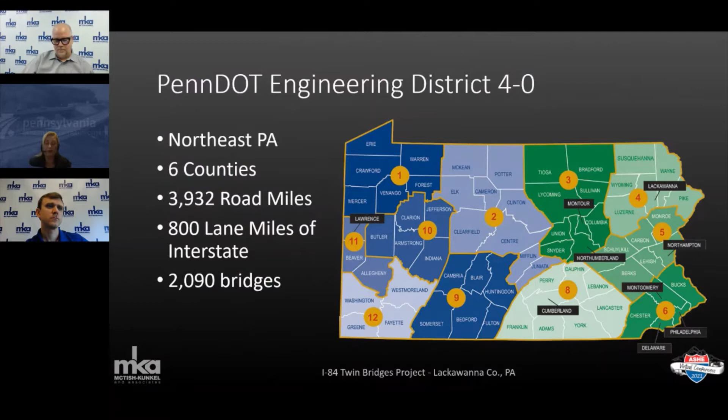First, a little background about PennDOT in this region. Engineering District 4 is located in the northeast corner of Pennsylvania and includes 6 counties. We're responsible for maintaining 3,932 miles of roads, including 800 lane miles of interstate, the most of any PennDOT district, as well as 2,090 state-owned bridges. The Twin Bridges project is located on the I-84 corridor just outside of Scranton near its connection with I-81, I-380, and historic Route 6.

For those who aren't familiar with the area, Scranton is about 120 miles west of New York City, 125 miles north of Philadelphia, and 120 miles northeast of our state capital in Harrisburg. The confluence of interstates and other strategic and priority routes in this area, including I-80, I-81, I-84, I-476, and I-380, provide critical linkage in each direction, and it's vital to the economic health of the area.

About 20% of the U.S. population lives within 300 miles of Scranton. The Twin Bridges project is located in Dunmore Borough and Roaring Brook Township, just outside of Scranton in Lackawanna County. You can see that our project is midway between the I-84, I-81 Route 6 interchange to the north and the I-84, I-380 interchange to the south. The Twin Bridges carry I-84 over Roaring Brook and the D&L Railroad just south of Exit 2 with State Route 435, which is also part of our project.

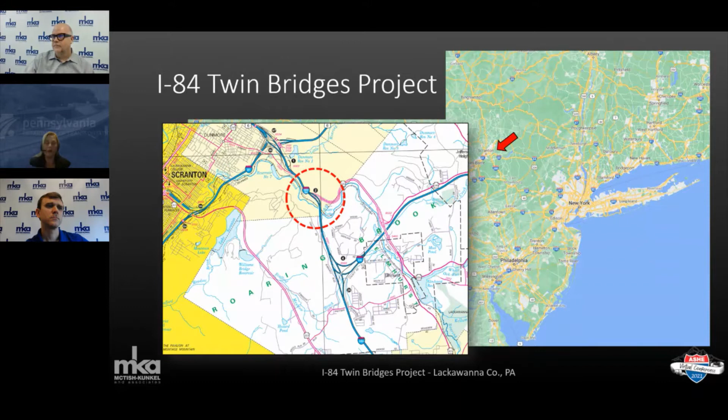A quick timeline on the project: the McTish-Kunkel & Associates Design Team was selected in April of 2015 and notice to proceed issued in July of that year. The environmental clearance was acquired in February of 2018. Bids were opened in February of 2020 with a low bid of $113 million. The project is currently in its second year of construction with substantial completion scheduled for December of 2025 and project closeout in early 2026.

Now I'm going to turn it over to Tim Benner, who will discuss the project's overall development and design.

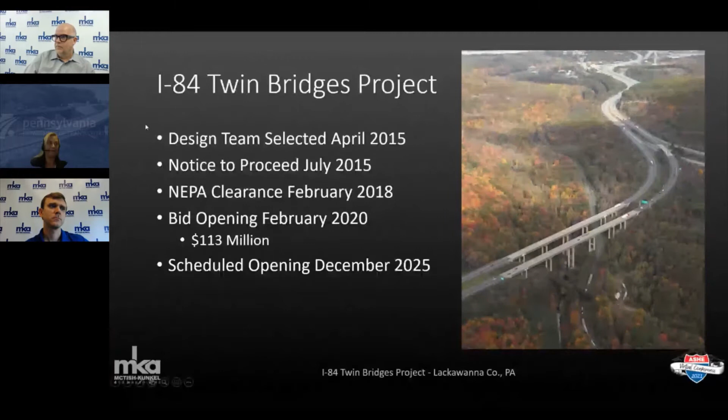Thanks, Sue. I'm Tim Benner, and I was the project manager for the Twin Bridges project.

The current bridges are pictured here looking north towards Scranton. There are 7-span steel twin girder bridges carrying I-84 over the D&L Railroad and Roaring Brook. The bridges are each about 1,100 feet long and 40 feet curb to curb, carrying 2 lanes each. Situated in a steep valley, the bridges are about 160 feet above Roaring Brook, roughly the equivalent of a 12-story building. The bridges also cross the former E&WV Railroad, seen in the foreground.

This bridge was built in 1883 and carried the former railroad over Roaring Brook and the D&L Railroad, although it hasn't been in service since the 1960s. The photo also shows the curved alignment of I-84 to the right as you go north, and the rock cut immediately north of exit 2. This rock face is about 130 feet high.

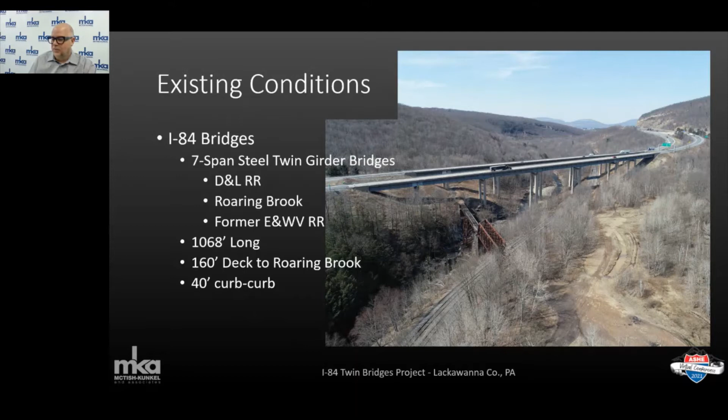The current twin girder bridges are fracture critical and include detailing typical to the design era that has since been determined to be fatigue prone. In addition to general deterioration over the years, these fatigue prone details have resulted in displacement induced cracking in main and secondary members after decades of fatigue cycles under heavy traffic.

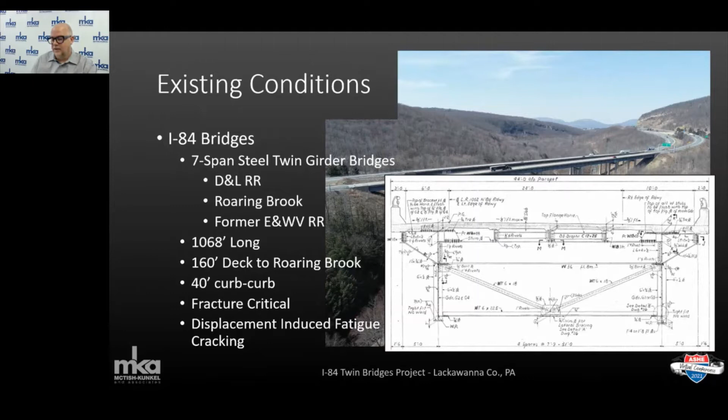PennDOT has undertaken several bridge repair contracts to address the fatigue cracking as well as other general deterioration. In fact, one of the initial items of work on this project was to conduct additional structural repairs to the existing bridges to keep them in serviceable condition as the new bridges were being constructed.

This is a view of the project area looking south towards the I-380 split. You can see the terrain is steep and I-84 is bifurcated through the project area, with the elevation difference increasing as you get closer to exit 2, where the ramp to State Route 435 southbound goes under I-84 westbound. The median width also varies through the project, widening as you get closer to exit 2.

Current traffic volumes on I-84 in this area are around 50,000 vehicles per day. It's also a heavy freight route with 26% trucks.

As you can see, exit 2 includes a non-conventional left-hand exit from I-84 eastbound to State Route 435 southbound. I-84 is 3 lanes wide from the I-81 interchange to exit 2, where the left lane becomes exit only. Exit 1, only half a mile from exit 2, brings in 2 on-ramps in a more conventional manner on the right, one for Tigue Street traffic and one for Route 6 traffic.

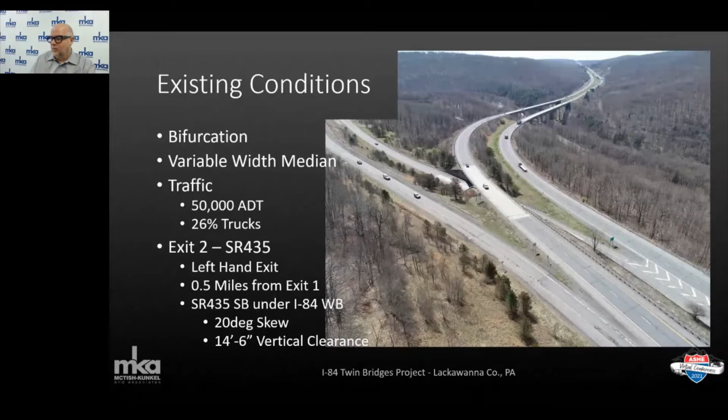The limited distance between the interchanges makes for a weave area that's challenging to navigate from right to left into the exit-only lane for southbound State Route 435. The current bridge over State Route 435 southbound also has substandard vertical clearance at 14 feet 6 inches and is highly skewed at 20 degrees - that's 20 degrees in PennDOT terminology, which is 70 degrees for AASHTO.

In order to develop a solution, it's important to understand the features within the project area. It may look like an untouched rural landscape at first glance, but this location has a long history. It was the location of the former town of Nay Aug that formed along the railroad from the mid-1800s through the early 1900s. The light gray line bisected by I-84 is Drinker Turnpike, which has been in place since the early 1800s. The light gray line to the southwest of I-84 is Brickyard Road, formerly Greenville Road, that connected Nay Aug to points south.

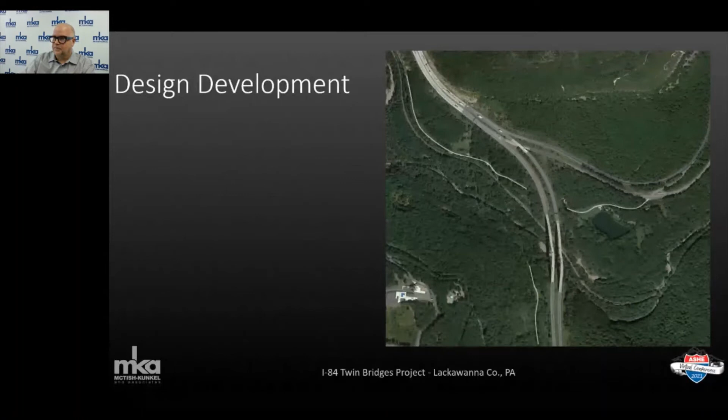Both are currently little maintained dirt and gravel roads. Roaring Brook is obviously a key feature through the project area, as is the D&L Railroad. These two features bisect the project site, creating access barriers to build and maintain the bridges.

Existing utilities include overhead electric and telephone lines, as well as two 30-inch water mains that deliver water from the Elmhurst Reservoir to Scranton. One of the water mains is located directly underneath the current bridge abutments.

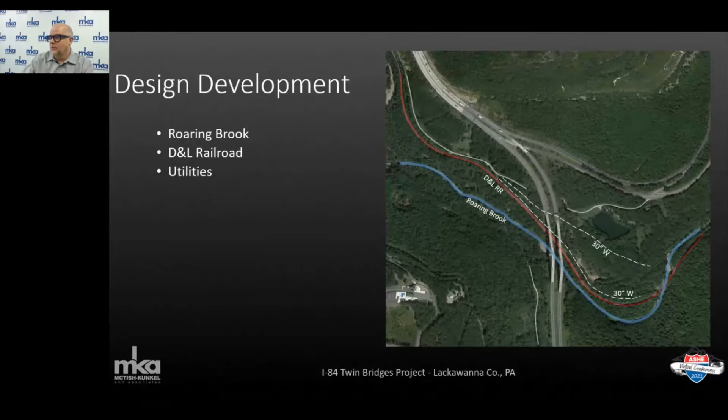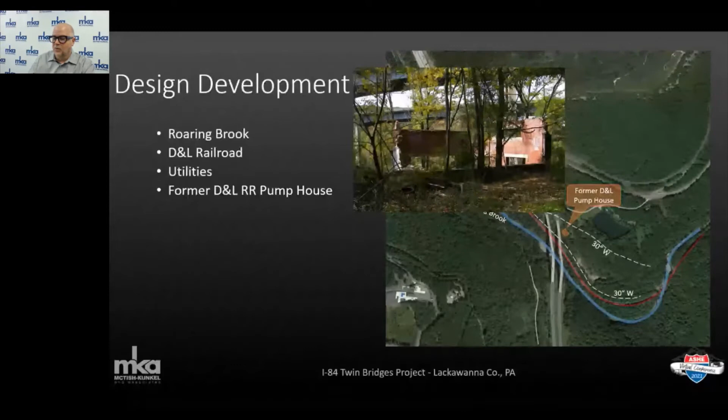We also had remains from the former D&L Railroad complex, including the pump house adjacent to the westbound bridge. The pump house was constructed along with Silver Lake to service the original steam-powered trains.

The former E&WV Railroad was also located within the project site and dates to 1884. Although the track has been removed since the 1960s, the bridge, which we highlighted earlier, is still in place over Roaring Brook and the D&L Railroad.

The Pennsylvania Coal Company Gravity Railroad was the predecessor to the E&WV steam line and was in service from 1850 to 1884. Gravity Railroads were systems of two separate one-way routes, one for loaded coal cars and one for empty coal cars. Cars were moved on narrow gauge track in a series of inclined planes, each with its own stationary steam engine used to pull the cars up the plane by cable. Downhill movement was powered by gravity. The track through our project area site was a light, or unloaded, coal car track.

The former Scranton Gas and Water Power Plant, in operation from 1910 until it was damaged by Hurricane Diane flooding in 1955, is located just downstream from the bridges. Large portions of the town and the railroad were also damaged during this flood event.

The remnants of the former Nay Aug Brickworks factory are located immediately west of the current bridges between I-84 and Brickyard Road. Factory remains are still visible within the I-84 right-of-way, and parts of Old Drinker Turnpike were paved with Nay Aug brick and are still in place. This photo was taken looking south from where the current I-84 bridges stand. The E&WV track runs directly in front of the brick factory, and Brickyard Road can be seen running from the factory to the top left of the photo. Foundations from some of the buildings in the background are still present between I-84 and Brickyard Road.

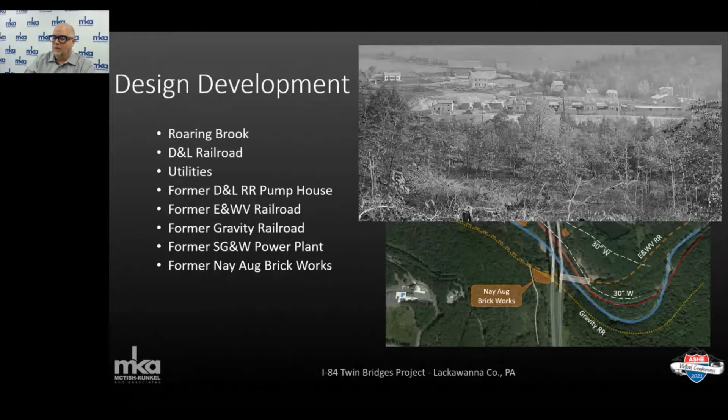To tie everything together, this is an old map of Nay Aug with the SG&W power plant and D&L pump station highlighted. I-84 currently runs between the two, across the former rail yard and the brickworks in the lower right. Both the D&L and E&WV railroads can be seen, as well as Old Drinker Turnpike and the town parcels.

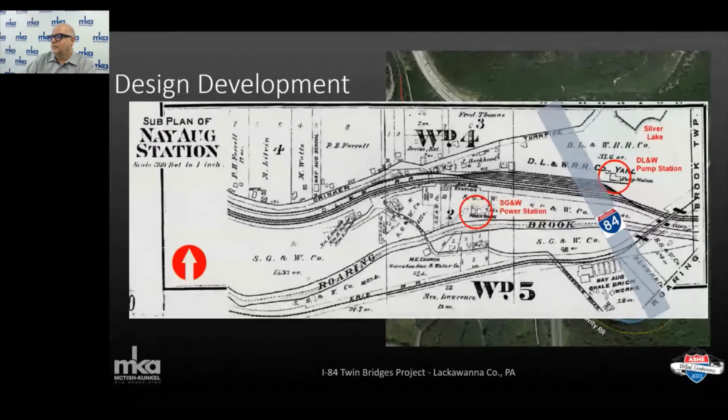We also have several wetland and waterways delineated in the project area. Several could not be avoided and required mitigation. On-site wetland mitigation is being constructed below Silver Lake between the two water lines as part of the project.

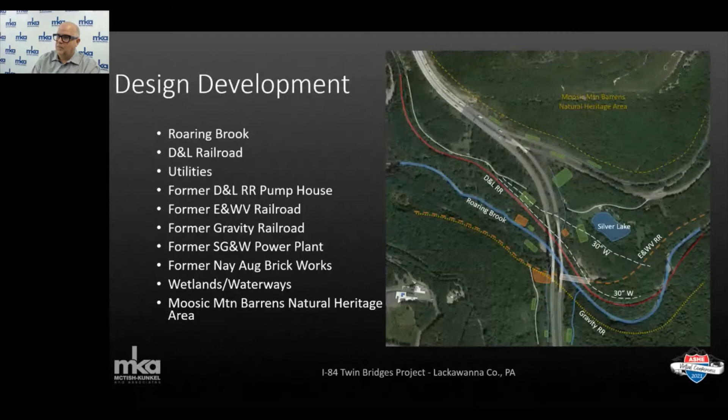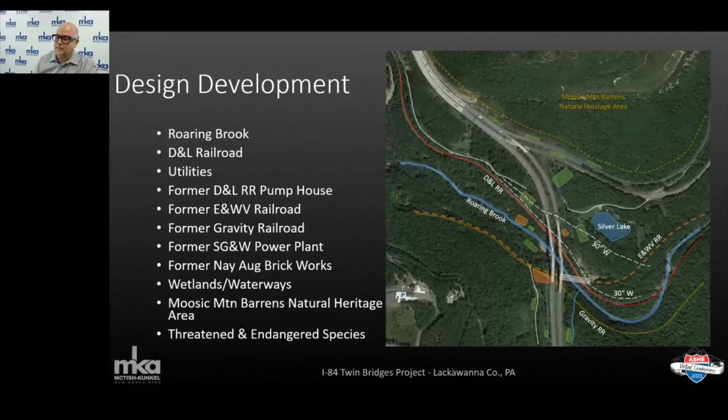The Moosic Mountain Barrens Natural Heritage Area is located just northeast of our project by the rock cut. We also had several threatened species, including timber rattlesnakes, identified near but not within the project area. One thing not highlighted is that several areas adjacent to the project are also part of the Pinchot State Forest, or in the process of being transferred to the state forest. As you can see, we had a lot to work around.

So now that we know what we're working with, here's what we needed to do. First, replace the twin bridges, which are in poor condition, and do it in short order. We needed to minimize impacts to the traveling public by maintaining 2 lanes of traffic in each direction on I-84 during construction. You'll remember that each bridge can only carry 2 lanes and are twin girder bridges, so staging the existing bridges was not possible.

We also needed to maintain traffic on the State Route 435 ramps. Although traffic volumes are not as great as the interstate, the available detour routes are limited, so we needed to minimize any ramp closure durations. Finally, we needed to evaluate the State Route 435 interchange to eliminate the weave condition between exits 1 and 2, provide the required vertical clearance for that movement, and improve safety.

Stormwater management and NPDES permitting was also a big concern during design development due to the terrain we're dealing with. All drainage makes its way to Roaring Brook, but there are limited areas available to address the additional stormwater rates and volumes associated with the project, while avoiding or minimizing impacts to cultural and historic resources. And constructability, the key to every project—we needed to develop a design that addressed all the project needs, worked within our constraints, and allowed for construction to proceed with limited restriction.

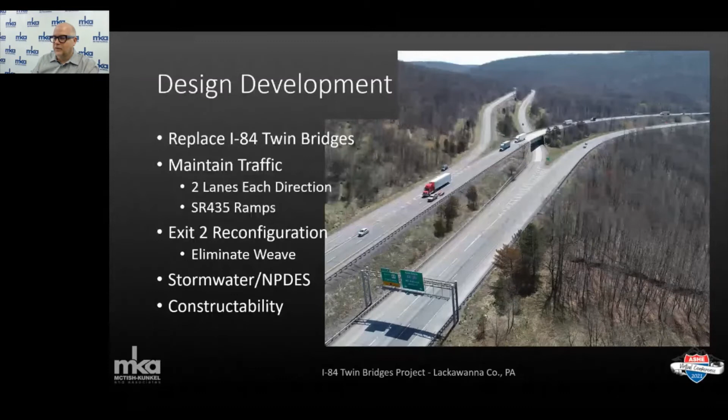After the portion of the new eastbound structure is completed in the median, we'll shift eastbound traffic to the constructed portion, demolish the current eastbound bridge, and complete construction of the eastbound structure. Both new bridges are being constructed in 3-lane configurations with 12-foot shoulders to accommodate current traffic as well as future redecking. Once the eastbound bridge is built, it's wide enough for both eastbound and westbound traffic to be shifted to the new bridge while the westbound bridge is constructed full width.

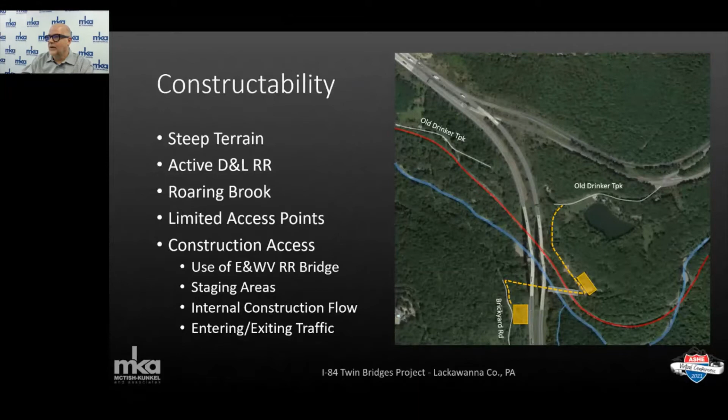The access way can be seen in this aerial taken early in construction. On the right, Brickyard Road is being improved to make the connection from I-84 to the old E&WV corridor and bridge site. You can make out the orange temporary protective fencing around the old brick factory between Brickyard Road and I-84 eastbound, which had to be avoided.

The access road then follows the old rail corridor under the I-84 bridges, across the E&WV bridge, and over Roaring Brook and the D&L Railroad. You might be able to make out the new decking on the E&WV bridge to the left. Ben will cover the railroad bridge improvements later in the presentation.

Multiple levels of access ways were also required to get down to Roaring Brook and the pier locations. We'll show those later in the presentation as well.

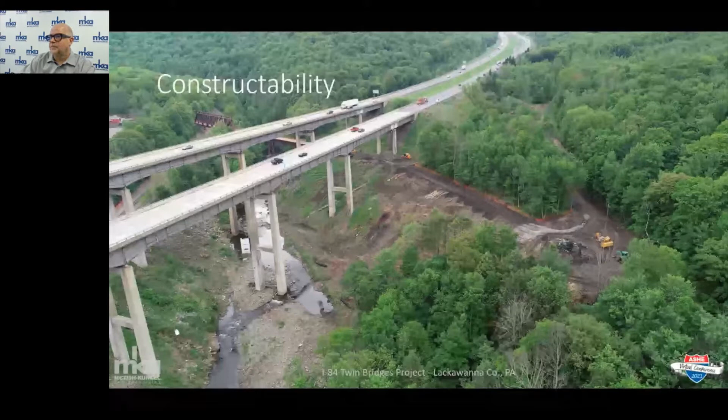This aerial is the eastern side of the site with the access from Old Drinker Turnpike in the lower left. You can see Silver Lake in the upper left and the demolition of the former D&L pump station ongoing near the westbound bridge adjacent to the access road. The access from I-84 eastbound is in the upper right-hand corner.

The construction access basically makes a figure 8 through the project site, connecting I-84 and State Route 435 and keeps equipment and materials moving in and around the site without impacting the traveling public.

Now I'll turn it over to Ben Martz, who will talk about the bridge designs and give an update on construction.

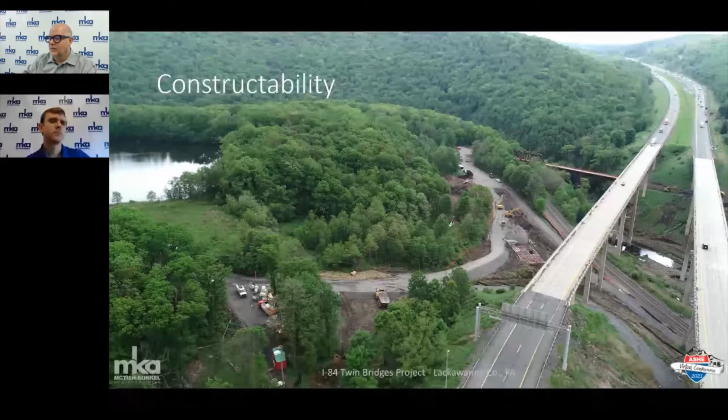Okay, thanks, Tim. My name is Ben Martz, and I was the lead structural engineer on the Twin Bridges project. As we have seen, the abandoned Erie and Wyoming Valley Railroad Bridge forms a critical link for both construction of the Twin Bridges and for its future use conveying the North Pocono Trail.

The existing structure is situated roughly 75 feet above Roaring Brook and 19 foot 6 inches above the active D&L Railroad. It is comprised of 2 simply supported riveted steel I-girder spans, each 96 foot long, and 1 simply supported steel Pratt truss span, 152 foot long.

Substructures include stone masonry abutments, 1 stone masonry pier, and 1 steel pier bent, each having a skew of roughly 45 degrees. To ensure viability for its intended future uses, McTish completed a 2-week site assessment in May of 2016, which included detailed structure inspection, survey, and material sampling to support a rehabilitation feasibility study that shaped the final scope of the rehab work.

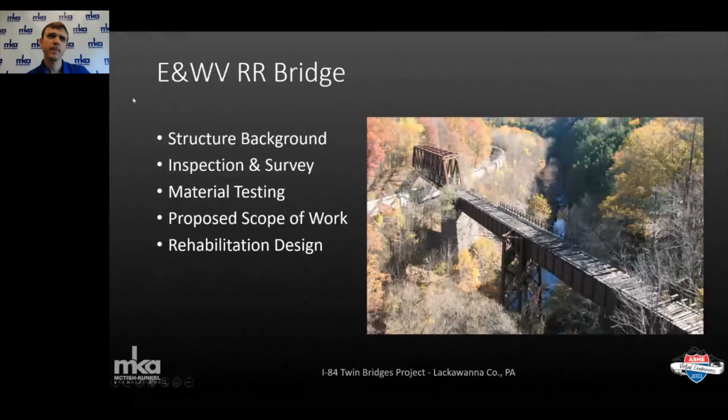Given the age of the structure and its current use, there were no existing plans or inspection evaluations available. This required complete rigging of the bridge to gain access and gather detailed measurements of structural members along with their current condition. Direct access to the top of the structure was available by walking the top flanges with safety hand lines, as you can see in this photo.

Additional access techniques included the use of a man lift for the upper truss portal frame, a pick for the lower levels of the I-girders, and a bosun's chair to inspect the steel pier bent.

Various survey techniques were used to establish the existing structure geometry. Conventional survey using a total station retrieved top of steel girder or stringer elevations, along with bearing seat elevations and truss panel points. An unmanned aerial system using a DJI Phantom 4 Pro drone also supplemented the conventional survey in areas with restricted access, particularly the outside face of girders.

To efficiently generate the geometry of the steel pier bent, a terrestrial scan using a Faro scanner created a 3D point cloud of the existing bent, as captured in this image.

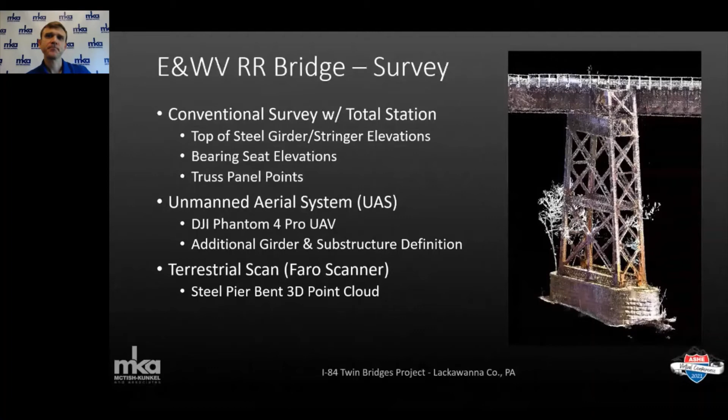Material samples were taken at non-critical areas of the existing steel structure, namely at a truss end block enclosure, a steel I-girder end projection, and at a broken lacing bar on the lower level of the steel pier bent. Steel samples were tested for chemical composition and mechanical properties to support engineering analysis of the rehab design.

Chemical testing showed uniform composition throughout the structure that agrees favorably with early low-carbon steels, featuring excellent ductility and weldability. Composition tests also revealed sufficient amounts of chromium, copper, and nickel that supports weathering steel behavior and is indicated by the well-developed rust patina shown in this photo.

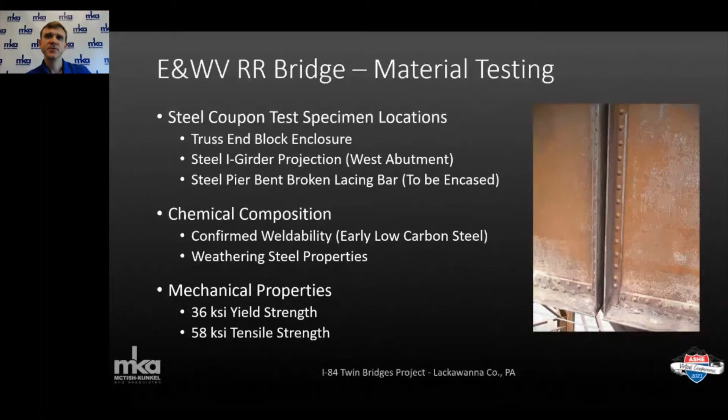Tests for mechanical properties indicated minimum yield and tensile strengths of 36 and 58 KSI respectively.

The rehabilitation scope of work centers around establishing a safe crossing by removal of the existing timber ties, complete cleaning of the bridge, and construction of a new reinforced concrete deck and barriers.

One of the major components of the rehab design was an asymmetric truss displacement needed to achieve a required 22-foot vertical clearance over the active D&L railroad for double stack rail traffic. To avoid impacting the steel pier bend, the I-girders retained their original position, and the required grade differences from raising the truss were taken with variable haunch over the I-girders, roughly 12-inch maximum.

Associated with the truss displacement was a modification of the north abutment seat and construction of reinforced concrete retaining walls to support the raised north approach. The vertical raise in the seat elevation at this abutment was approximately 5 feet.

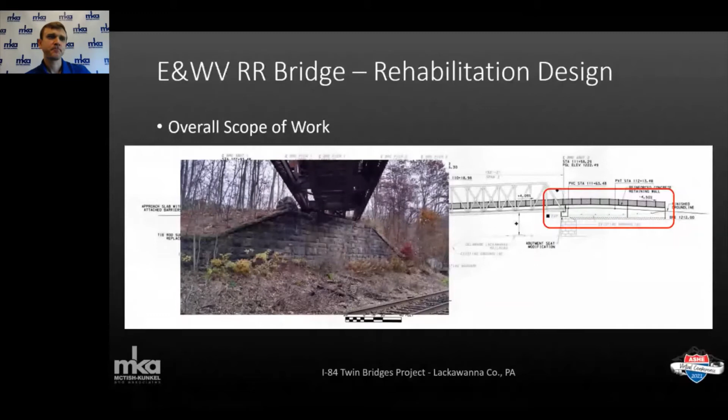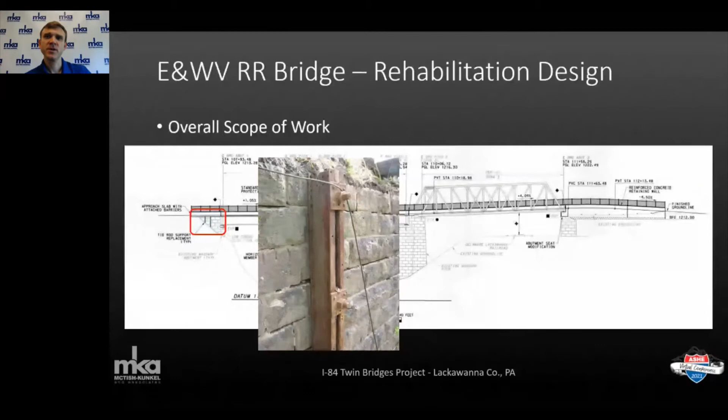Existing tie rod supports at the south abutment were replaced in kind using similarly sized weathering steel members, and stone masonry repointing was also needed in select areas as seen in the photo.

Frozen existing metal bearings at the ends of the I-girder unit were replaced with laminated neoprene pads to relieve thermal forces on the steel pier bent.

The mid-level horizontal lacing members of the steel pier bent suffered from heavy corrosion and were also replaced in kind.

The bottom of the steel pier bent showed heavy corrosion, especially at isolated connection plates, as you can see here. This condition warranted complete concrete encasement of the bottom of the pier bent for a height of roughly 5 feet.

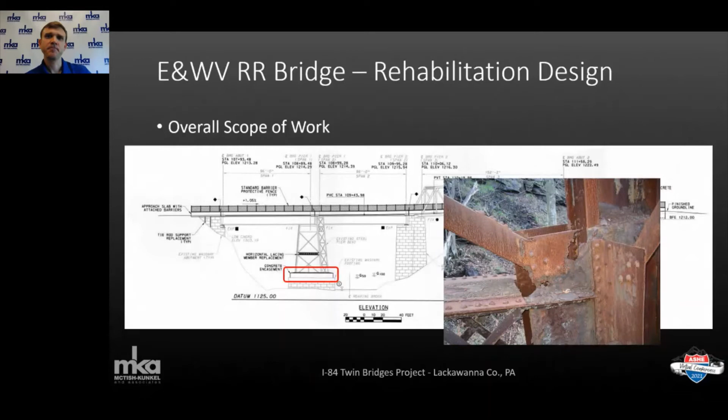Additionally, a new approach slab with attached barriers was detailed at the south abutment to contain the future trail in this area of very steep terrain adjacent to the abutment.

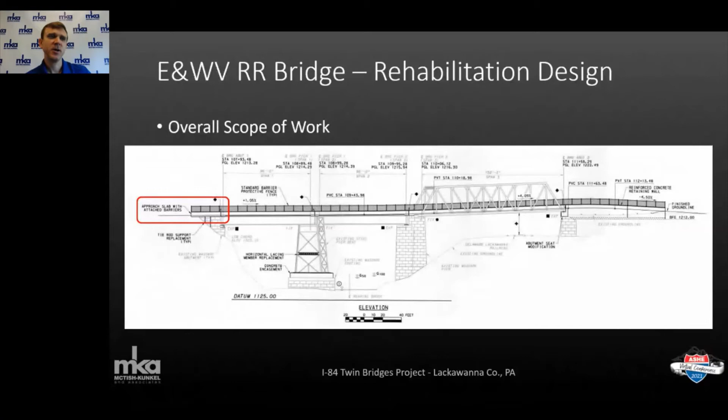Features such as this, along with barrier protective fence along the entire length of the structure and maximum longitudinal grades of about 4.5%, were incorporated into the design to ensure future pedestrian safety.

The proposed typical section over the I-girder spans include an 8-inch reinforced concrete deck with vertical wall barriers and protective fence atop the existing 8-foot deep twin I-girders.

Contractor access was provided through the truss span with a minimum of 12-foot horizontal and 18-foot 10 inch vertical clearance. The 12-foot curb-to-curb width was constrained by the existing truss width and was carried over the entire structure.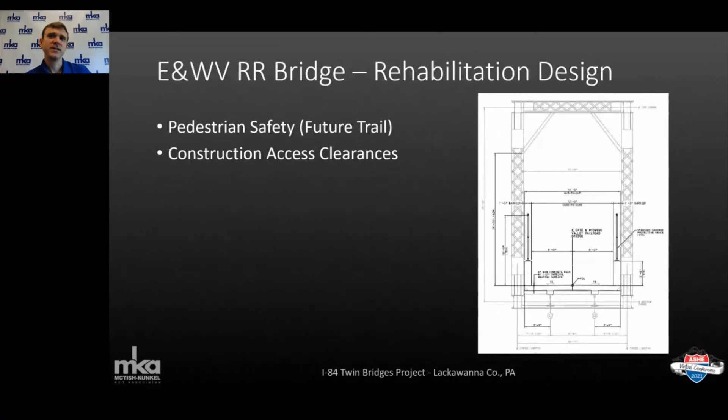The rehabilitation design meets the Secretary of the Interior's criteria for the rehabilitation of historic structures. Members requiring replacement were done so with in-kind features using weathering steel to closely match the existing appearance.

Precise survey of the steel pier bent allowed accurate detailing for the in-kind replacement of the mid-level lacing member as seen here. The north abutment seat modification also incorporates a veneer finish to mimic the existing stonework.

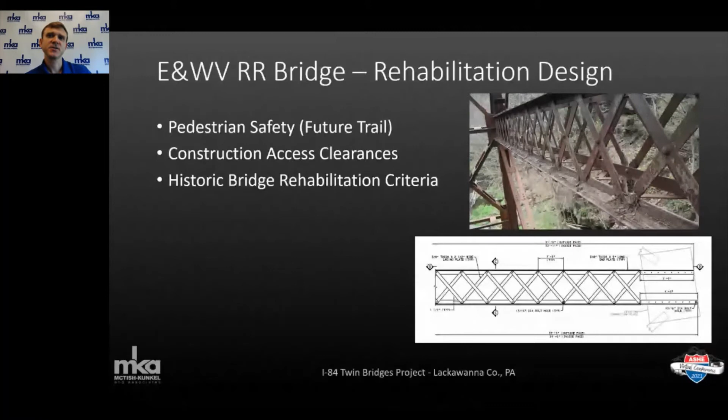Load ratings for the steel truss and I-girders were based on load factor design methodology using PennDOT's Bar 7 software, and the new retaining walls of the north approach were designed with PennDOT's ABLRFD software.

The existing pier bent was analyzed using a 3-dimensional finite element model in STAAD with manual LFD specification checks. Geometry for the steel pier model was generated from the 3D survey point cloud that we saw earlier.

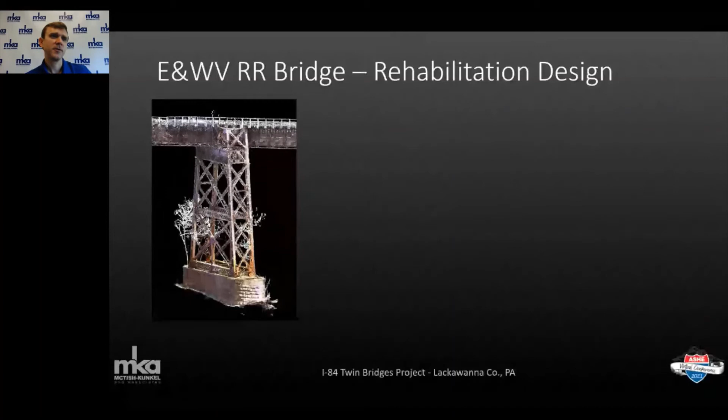A wireframe figure was created from the point cloud to establish nodal geometry coordinates, which could then be imported directly into STAAD to create the 3D analysis model.

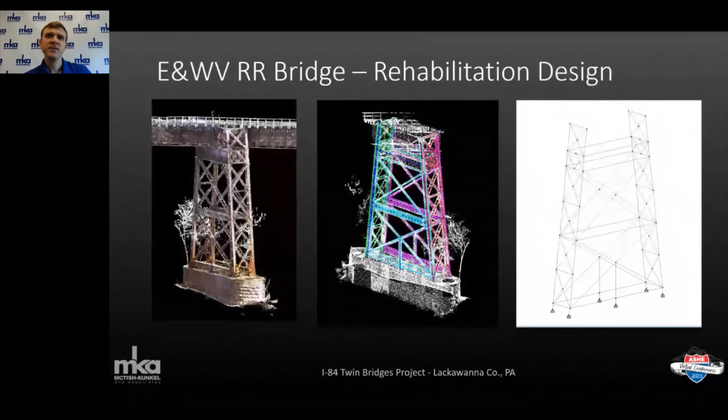Having established appropriate construction access, our focus turns now to the replacement of the I-84 twin bridges.

The design was developed in accordance with the AASHTO LRFD bridge design specs as supplemented by PennDOT's Design Manual Part 4. Layouts of the replacement structures were driven by the intended traffic control approach and site constraints, including the future North Pocono Trail, Roaring Brook, Delaware-Lackawanna Railroad, active PAWC water lines, and existing substructures.

Both bridges are generally on tangent horizontal alignments, except for the northern end spans that are influenced by the curved approach roadway, which produce transitions to full super elevation on structure. The vertical profile over each bridge is also predominantly tangent, except for sag curves that spill onto each end span.

The resulting span arrangement lent to the use of 4-span continuous composite steel plate girder superstructures with spans ranging from 228 feet to 330 feet max.

To achieve proper span ratios, the north abutments had to be placed directly over one of the active PAWC water lines, requiring relocation of the water line to avoid the proposed foundations that we'll talk about later.

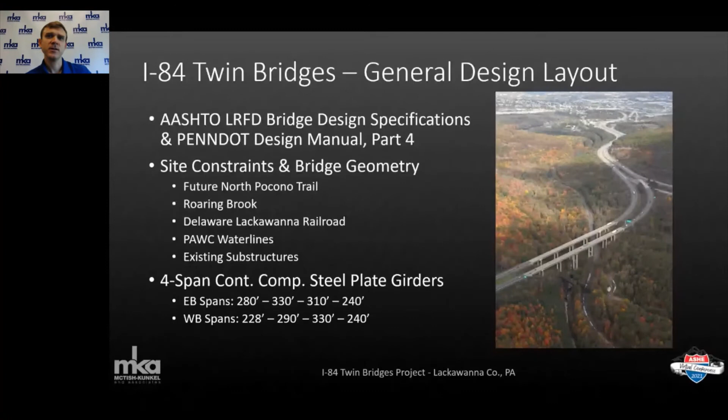The overall width for each superstructure was 63 foot 4.5 inches, which was dictated by the need for 3 12-foot travel lanes, 12-foot shoulders due to heavy truck volumes, and MASH compliant F-shaped barriers.

The final girder framing arrangement included 5 girders at a 13-foot 9-inch spacing with 4-foot 2¼ inch overhangs, and the selected girder web depth was 10 feet.

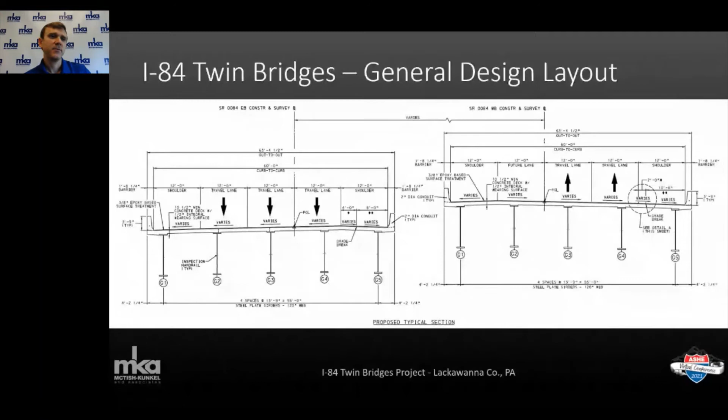With significant clearance under the existing bridges, early action pier construction was vital to minimize impacts to traffic. Half-width staging of the eastbound bridge was selected due to constructability concerns with restricted median width and to avoid closely spaced bifurcated superstructures. The eastbound roadway profile was designed in coordination with the 10-foot girder web depth to ensure satisfactory clearance to build the new pier caps underneath the existing steel girders.

The eastbound roadway horizontal realignment was also set to position the half-width superstructure to avoid interference with the existing bridge. Staging of the eastbound bridge also satisfied the need for full-width construction of the westbound bridge and roadway needed to accommodate a required 9-foot vertical profile adjustment for the new flyover bridge.

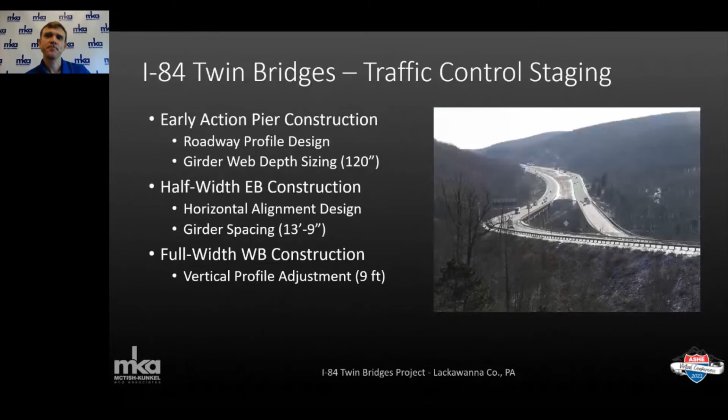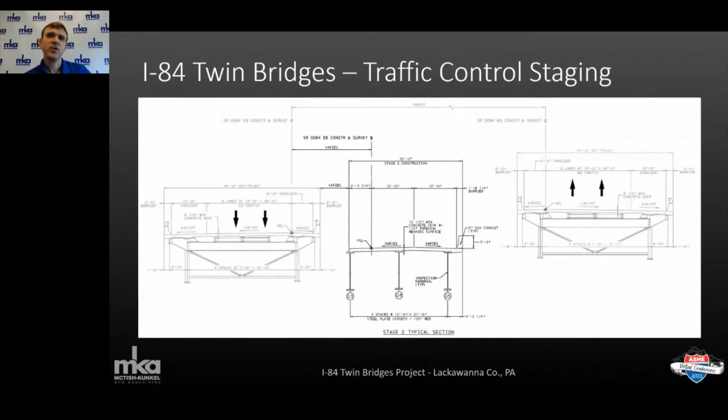The staging sequence begins with constructing half-width of the new eastbound bridge in the median under existing traffic patterns. Of course, all the eastbound piers and the staged abutments have been built prior. 3 of the 5 girder lines are erected in the stage, along with 32 feet of deck to support 2 lanes of staged traffic.

Next, both lanes of I-84 eastbound traffic are shifted to the new half-width structure while the entire existing eastbound bridge is demolished and the remaining portion of the new eastbound superstructure built. This stage requires erection of the remaining 2 girders, which introduces temporary stability concerns that we will discuss in a moment. 2 separate deck pours, including a closure pour between girders 2 and 3, was specified to deal with large dead load deflections.

Following completion of the eastbound bridge, 2 lanes of westbound traffic are then crossed over so that all 4 lanes of I-84 traffic are on the new eastbound bridge. Under this stage, the existing westbound structure can be demolished completely and the new structure built full width.

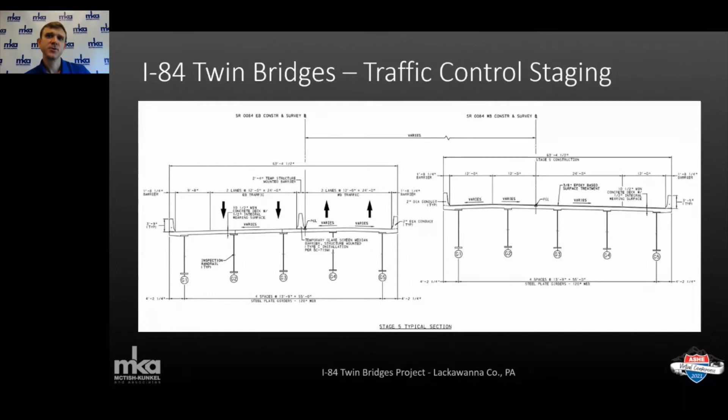Generally speaking, design of the twin bridges was carried out using PennDOT approved software to perform LRFD specification checks. Those aspects of the design requiring refined methods of structural analysis were done using a parametric 3D finite element model in CSI Bridge. With respect to the superstructure, PennDOT STLRFD software was used to design the steel plate girders, while the CSI Bridge model provided verification of live load distribution, cross-frame forces, thermal loads for bearing design, lateral bracing forces, and construction staging analyses.

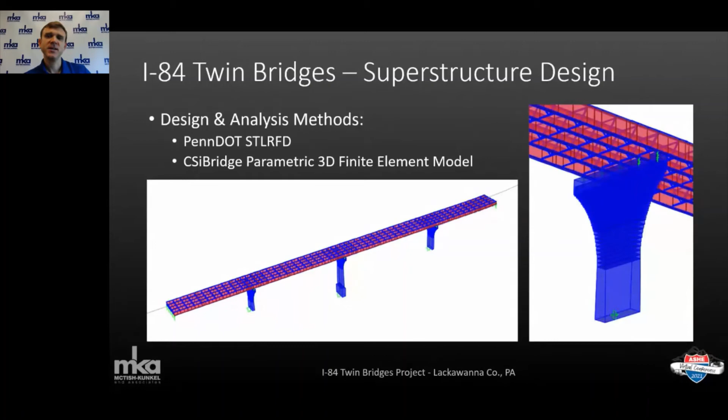The steel plate girders use grade 50 weathering steel with HPS 70W steel in flanges over the piers. 13 field splices limit field sections to a maximum of 105 feet to accommodate shipping and girder erection. Plate sizes were detailed as uniform as possible with 2 discrete flange widths, 34 inches over the piers and 28 inches elsewhere. The 10-foot web depth was also matched on the flyover bridge to realize fabrication economies of scale.

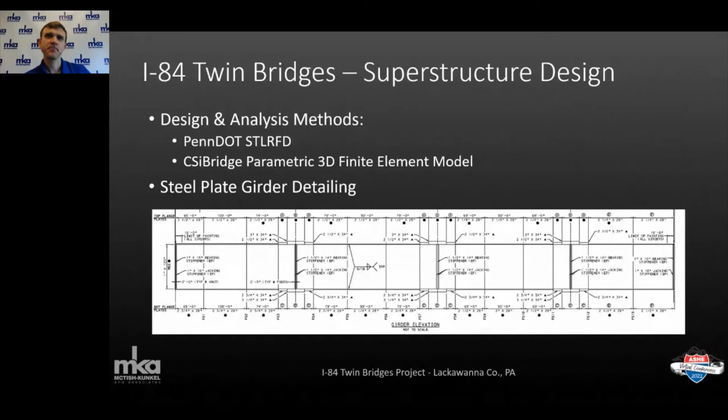Intermediate steel cross frames used a K-frame configuration, and top flange lateral bracing was used along the entire length of the bridges in both fascia bays to aid in construction staging.

Design build high-load multi-rotational disc bearings were specified since the maximum design vertical load capacity of 2,000 kips fell outside normal PennDOT standards. Substructures were detailed on the contract plans based on preliminary bearing heights, and bearing seats were adjusted in construction after the final bearing designs were complete.

Being complex structures, construction staging analyses were carried out in CSI Bridge to ensure a feasible conceptual girder erection sequence was presented on the construction plans.

Additional staging analyses specifically addressed global stability during the staged eastbound deck pours, particularly for the 2 girder condition we saw earlier. This particular stage required temporary lean-on bracing be installed at intermediate points between the stages to stabilize the 2 girder system during the deck pour.

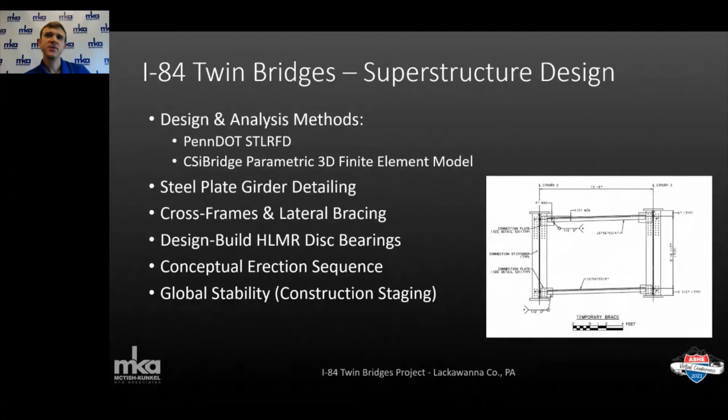The critical stage deck pour was simulated in CSI Bridge for an unbraced condition since non-composite dead load deflections were on the order of 6 inches. The resulting instability led to inclusion of the temporary lean-on bracing, and the updated model shown in the graphic to the right was used to design the temporary bracing and establish the required brace points shown on the construction drawings.

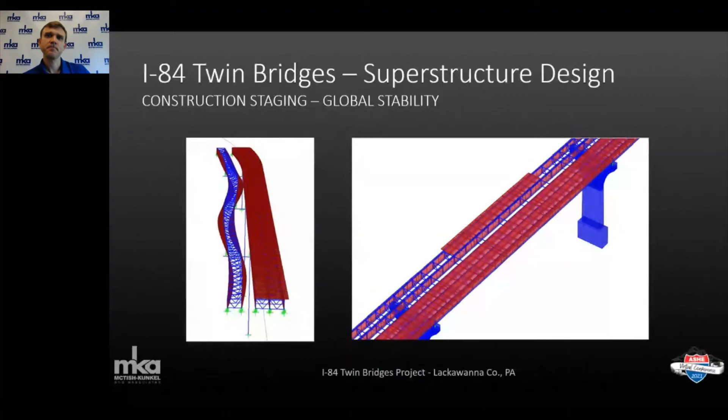Both eastbound and westbound structures were designed with reinforced concrete cantilever abutments and hammerhead piers. The abutment design was carried out using PennDOT ABLRFD software, and due to the length of the wing walls, mechanically stabilized earth U-wings were used at each corner of both bridges.

Pier heights range from 68 feet to 150 feet max, with the majority of the piers in excess of 100 feet. To accommodate jacking of the steel superstructure for future bearing replacement, the pier cap width was set at 6 feet and the pier stem tapered to the top of the footing.

This geometry resulted in slender piers conducive to consecutive fixity, and in fact, all piers were fixed on both bridges. The CSI Bridge model was used to establish longitudinal force distribution that was incorporated into Viathor VBent software, responsible for LRFD specification checks of each pier. In addition, nonlinear P-delta analyses in CSI Bridge further evaluated slenderness effects, particularly for the eastbound piers subjected to the in-service half-width stage superstructure.

The proportions of the piers mandated the use of measures to control heat of hydration associated with mass concrete, since footings average 10 foot thick, with plan dimensions on the order of 30 to 40 foot square. A thermal control plan was developed by the contractor, incorporating circulated water through PVC pipes to limit concrete temperatures for proper curing.

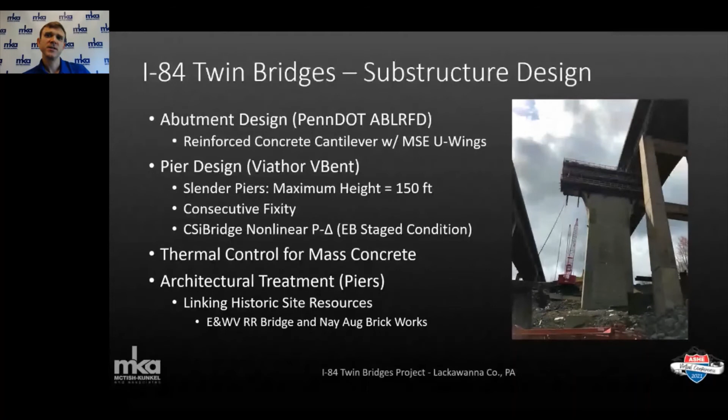Ashlar stone heavy cut was chosen as a blended pattern to incorporate the stone masonry and brick theme. These photos show the evolution of the design from conception with the E&WV Railroad Bridge masonry pier to the plan specification and then to the physically constructed pattern.

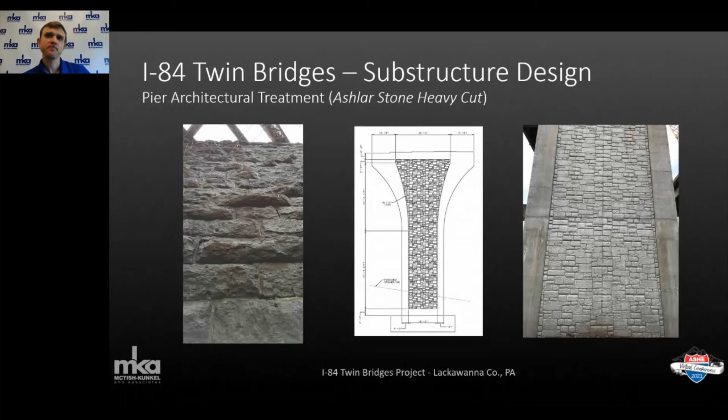An array of foundation types were required due to variable subsurface conditions across the structures. The south abutments used driven HP 12x84 piles approximately 40 foot long. Dynamic pile load monitoring was specified for all test piles.

The piers were generally founded on sandstone bedrock, except for eastbound Pier 3, which used 48-inch diameter drilled caissons. Due to the thicknesses of the pier footings and the steep rock profiles, substantial rock excavation was required, particularly at eastbound Pier 2, shown in this photo.

The eastbound Pier 3 caissons were roughly 60 feet in length, including 13-foot rock sockets. Cross-hole sonic logging and thermal integrity profiling were required at each caisson.

The north abutments were founded on 9 and 5/8-inch diameter micropiles, approximately 90 feet long. Micropiles were used here due to the presence of larger boulders in the north approach fill, as well as that portion of the PAWC water line to be left in place after its relocation. Both proof and verification load tests were required during micropile installation.

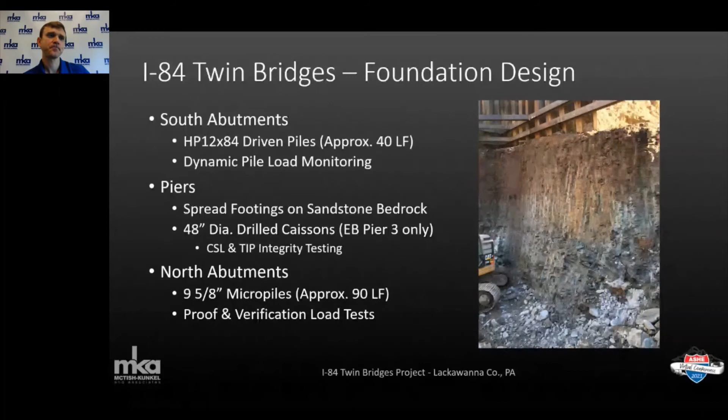Construction began on the Twin Bridge project in April of 2020 and has persisted through the COVID-19 pandemic. McTish was granted approval to perform aerial drone flights to monitor construction status, and some of the aerial photos will be seen on the following slides.

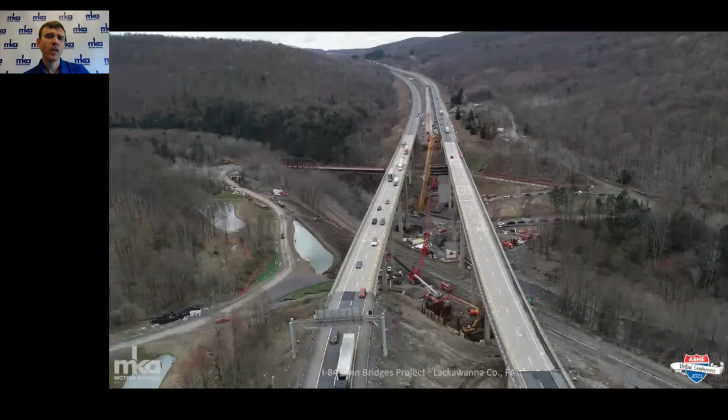Structure work has focused primarily on the eastbound substructures. The contractor chose to defer complete rehabilitation of the E&WV Railroad Bridge until later in the project and selected to instead install timber decking for temporary construction use.

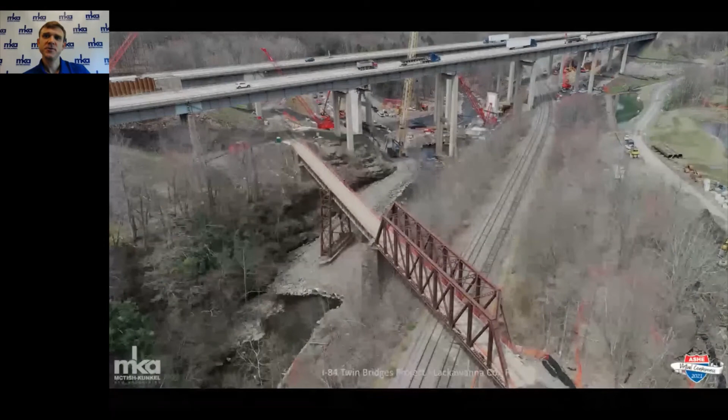Excavations for the Flyover Bridge Pier are ongoing, and the contractor is currently constructing a temporary soil nail wall to support the pier foundation installation. It's expected to occur this summer.

Additionally, a roadway median excavation has been completed in preparation for construction of the realigned eastbound roadway that will tie into the staged mainline bridge. SR 435 ramp traffic is currently being maintained during these operations.

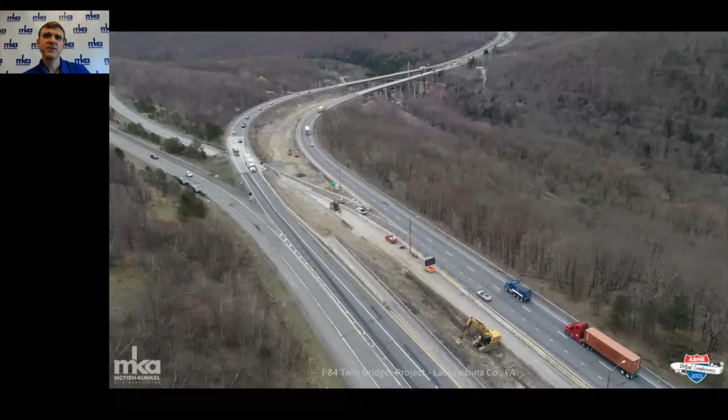Construction of the first stage of the eastbound bridge south abutment is ongoing, and the eastbound Pier 1 is nearing completion.

Installation of the drilled caissons at eastbound Pier 3 is also progressing, with about a third of the caissons installed to date. The PAWC waterline relocation is expected to occur later this summer after the pier footing is completed and backfilled.

Building the pier caps in close proximity to the existing steel posed some constructability challenges, especially for the top cap pour within roughly 2.5 feet of the existing steel at eastbound Pier 1. This will be the minimum clearance with offsets approaching 4 feet for piers 2 and 3 on this bridge. The contractor used a creative slickline technique to make this top cap pour with no major issues.

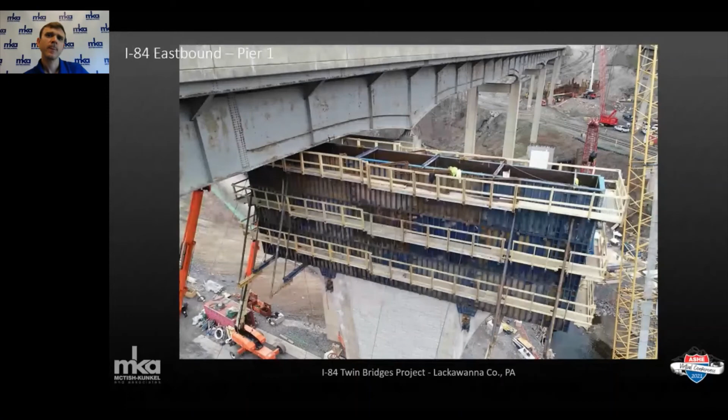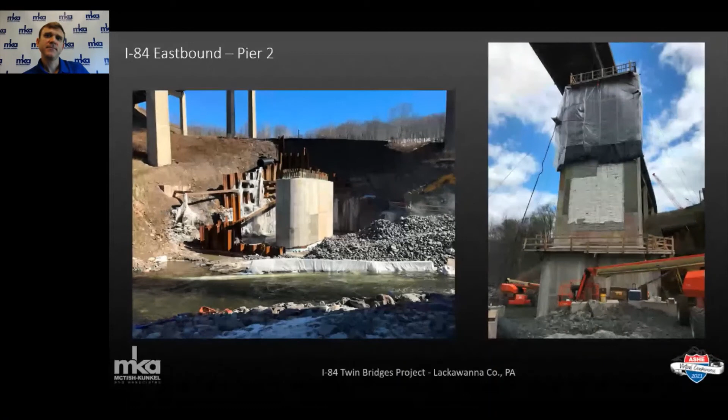After overcoming the significant rock excavation, eastbound Pier 2 is beginning to take shape. The base plinth was completed last fall, measuring roughly 12.5 feet wide, 30 feet long, and 25 feet tall. With the second stem pour almost complete, the cap construction should be starting soon.

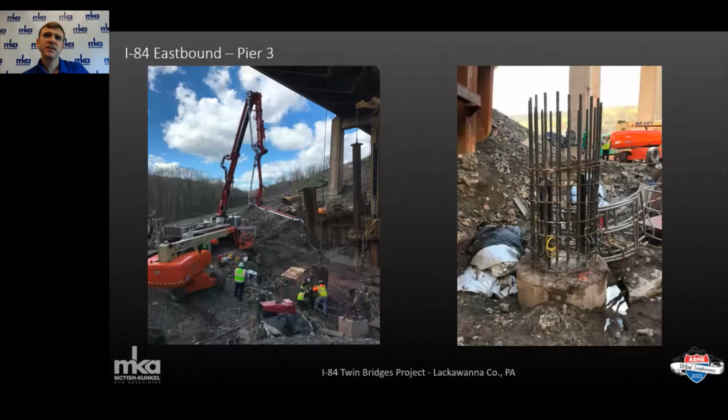And now we'd like to show a little video of flight through the active construction site to get a first-hand look at construction progress.

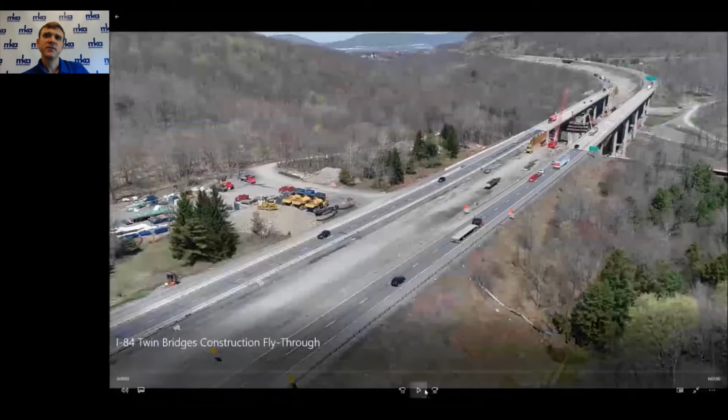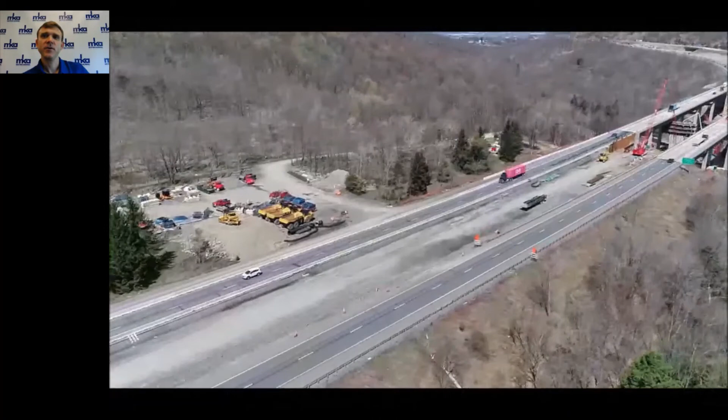Beginning on the southern approach to the bridges, you can see the southwest staging area and construction access off of I-84 eastbound. Brickyard Road is in the background, forming the linked access roads leading under the bridges.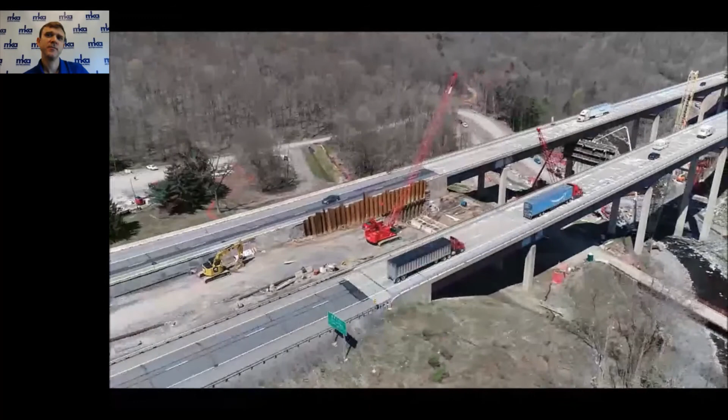The eastbound south abutment construction is progressing with footing being reinforced and formed, and the Pier 1 cap pour is taking place. The NW Railroad Bridge is in service with its temporary timber deck, and the first of 2 temporary stream crossings is in place around the base of the steel pier bed.

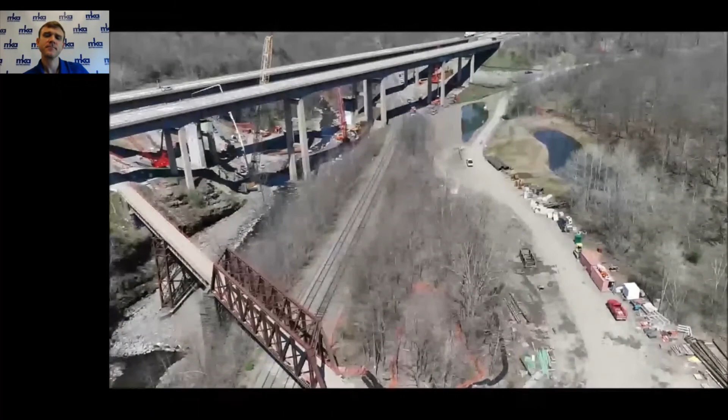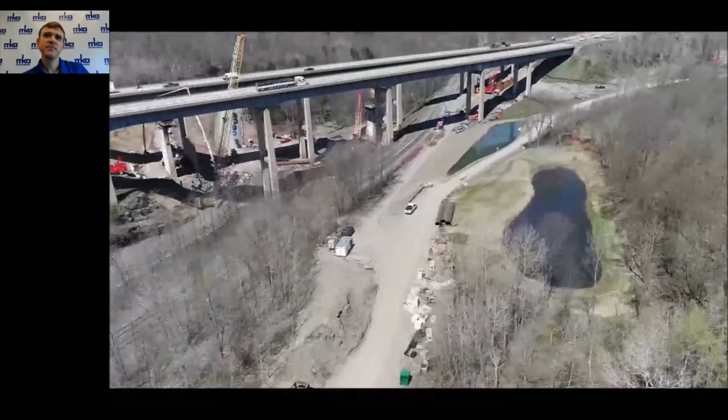Adjacent to the railroad bridge is the northeast staging area, with the wetland mitigation site on our right and a stormwater basin located on the opposite side of the northeast access road leading up to Old Drinker Turnpike and Silver Lake.

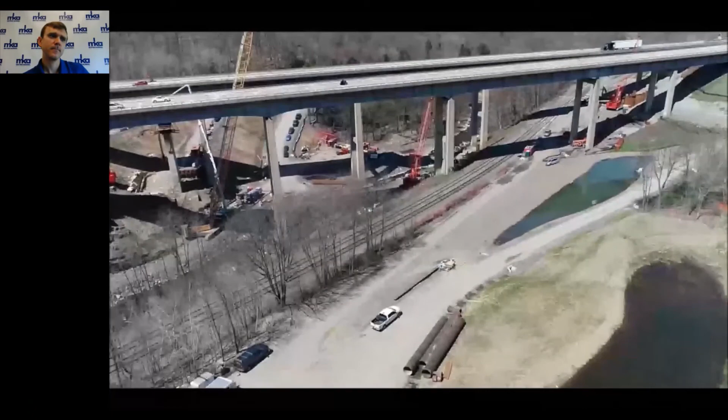As we move under the bridges, you can see the various access roads leading to Pier 1 and to the temporary crossing of Roaring Brook. This is the second temporary stream crossing in place directly underneath the bridges.

Eastbound Pier 2 stem forming is taking place here, and at this point, it has reached a height of roughly 80 feet.

You can also notice in the background the setup of the concrete pump truck for the Pier 1 cap pour. This is the final cap pour, and the pump truck is pumping roughly 110 feet to the top of the cap.

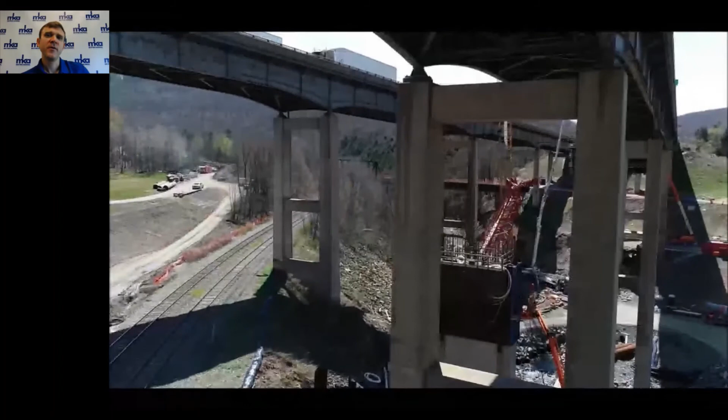As we move up from under the existing bridges, you'll get a quick look at the eastbound Pier 3 caisson progress with drilling taking place.

And behind the Pier 3 excavations, you can see access cut in for the PAWC water line.

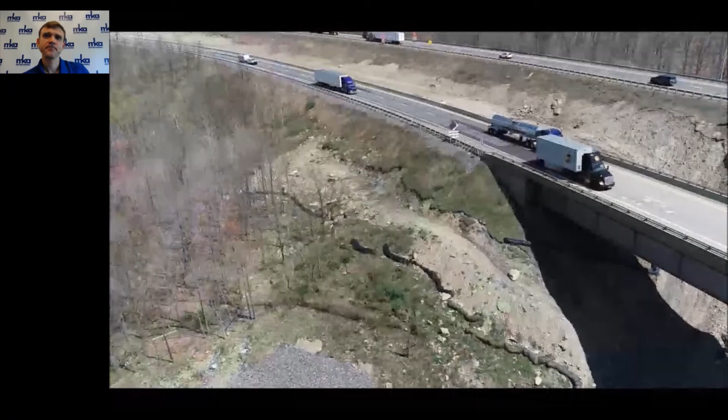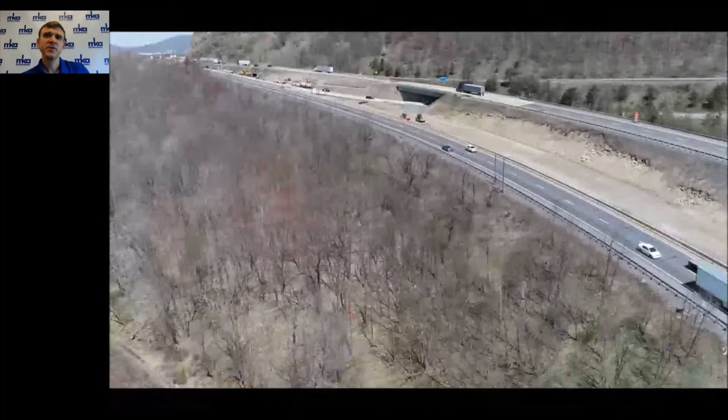And another view of the median excavation ready for the first stage of eastbound roadway realignment. This is also a good view of the steep hill slopes on the western side of I-84, as well as the rock cut in the upper portion of the screen.

Approaching the site of the new flyover bridge, you can see the ongoing excavation and installation of a temporary soil nail wall. The new pier will be located roughly where the construction equipment is now.

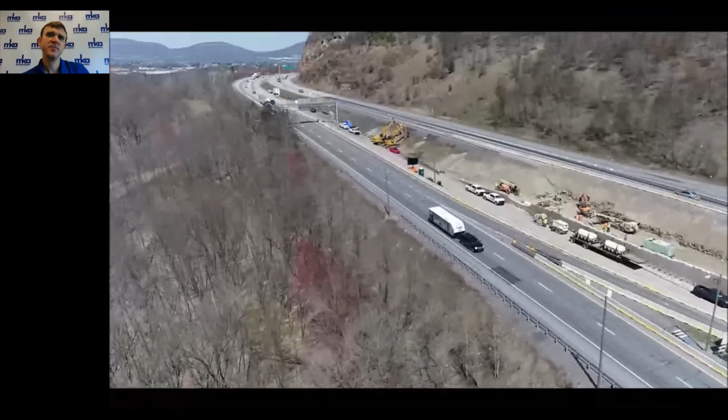The flyover bridge pier will also be founded on drilled caissons, which are expected to be installed this summer after the eastbound Pier 3 caissons are finished.

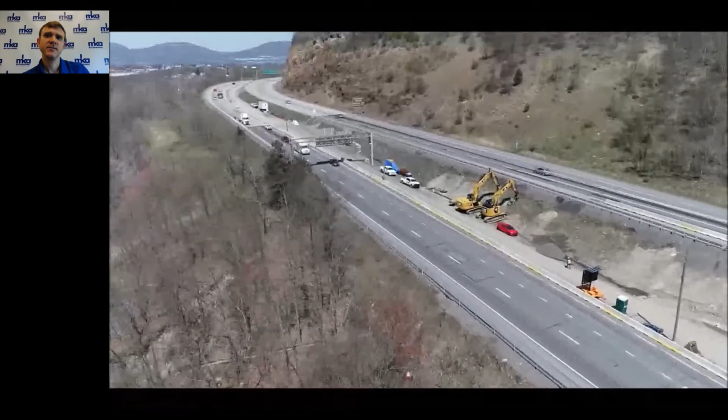Traffic is currently being maintained uninterrupted. As you can see, the temporary barrier is set up to protect not only the I-84 main line, but also the SR 435 ramp traffic around this construction zone.

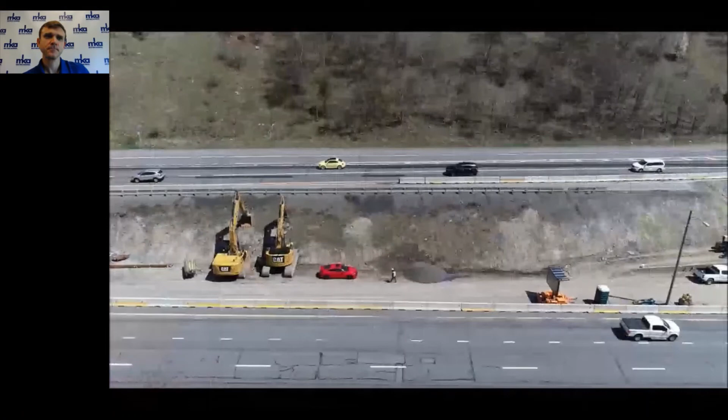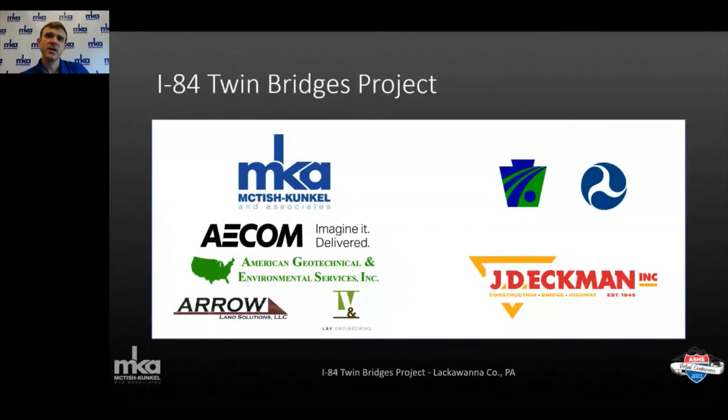At this point, we'd like to take a moment to acknowledge our project team that included AECOM, AGES, L&V Engineering, and Arrow Land Solutions. We'd also like to acknowledge PennDOT with Sue Williams as the project manager, FHWA, and JD Eckman, who is the contractor for the project.

This concludes our presentation, and we'll welcome any questions at this time.

Ben, thank you very much. I appreciate that. I would just like to start off by thanking Sue Williams of PennDOT District 4, Tim Benner, and Ben Martz of McTish, Kunkel and Associates for an excellent presentation today. It looks like you guys ran into just about every snag you could on the project, and I wish you luck during construction.

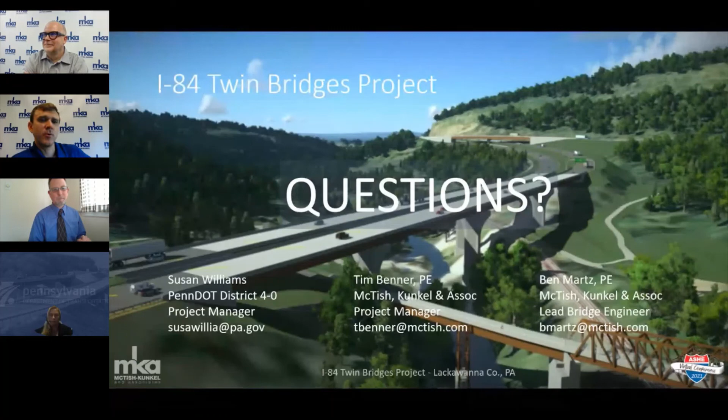Yeah, I can speak on that a little bit. So we developed a conceptual girder erection sequence, under the assumption that the girder segments were going to be delivered via mainline on the existing bridges or portions of the new bridges. So, of course, the existing bridges were rated, and like I mentioned in the presentation, the girder segment lengths were sort of minimized there to around 100 feet, so that we limited our weights for use on those picking from the existing bridges.

And I believe, speaking with the contractor, they're holding with that same concept. They're going to bring the girders in, do short term. We have short term single lane closures, night work, so on and so forth, to achieve that. But the girders, that concept should hold. They bring them in on the main line.